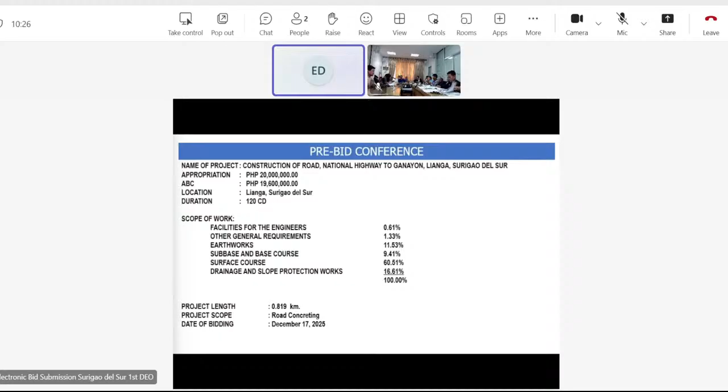Okay, we'll proceed to the presentation of the first project, 26NH001, presented by Engineer De Guzman. Please proceed, Engineer. Thank you. Thank you, Mr. Chair. Good morning once again. So for the project 26NH001, construction of road National Highway to Ganayon, Lianga, Surigao del Sur. This project has an appropriation of 20 million and the ABC is 19,600,000, located at Lianga, Surigao del Sur. The duration is 120 calendar days.

The scope of works: facilities for the engineer, 0.61%, other general requirements, 1.33%, earthworks, 11.53%, sub-base and base course, 9.41%, surface course, 60.51%, drainage and slope protection works, 16.61%, a total of 100%. The project length is 0.819 kilometers, and the project scope is road concreting. The date of bidding would be on December 17, 2025.

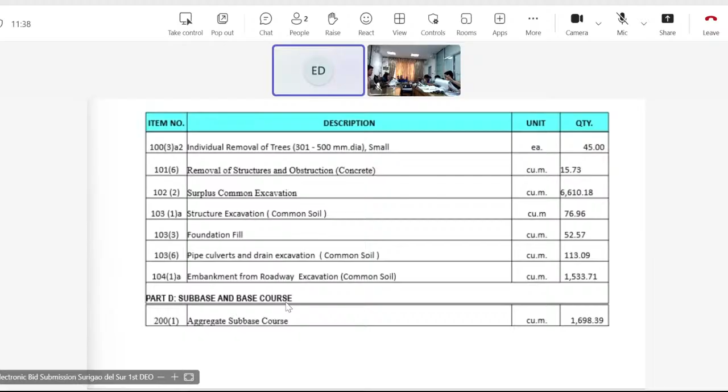Here is the summary for the item number, description, unit and quantity. For Part A, facilities for the engineer, and Part B, other general requirements. For Part C, earthworks, and Part D, sub-base and base course, item number, description, unit, and quantity are being shown. For Part E, surface courses, and Part F, drainage and slope protection works, item number, description, unit, and quantity are being shown.

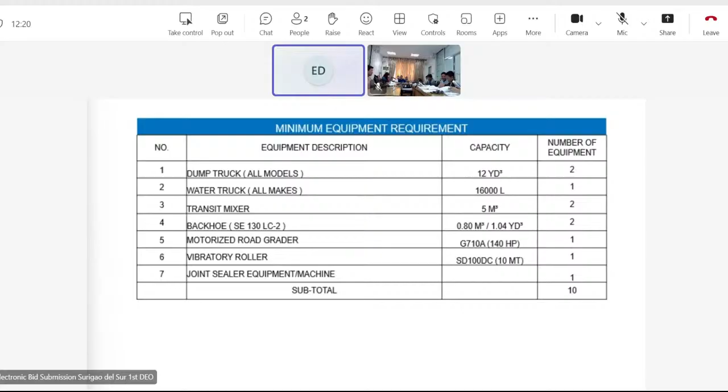For the minimum equipment requirement, we have dump truck 2, water truck 1, transit mixer 2, backhoe 2, motorized road grader 1, vibratory roller 1, and joint sealer equipment or machine 1, a total of 10. For the breakdown, for the construction of field office, we have 1 unit 7x7 bunkhouse. Then project billboard, we have 4 units for DPWH and 4 units for Cagwait. Here is the project billboard.

For the occupational safety and health program, we have 1 first aider and 1 safety practitioner. Both are full-time. Then for the materials, the name and specification, unit and quantity are being shown.

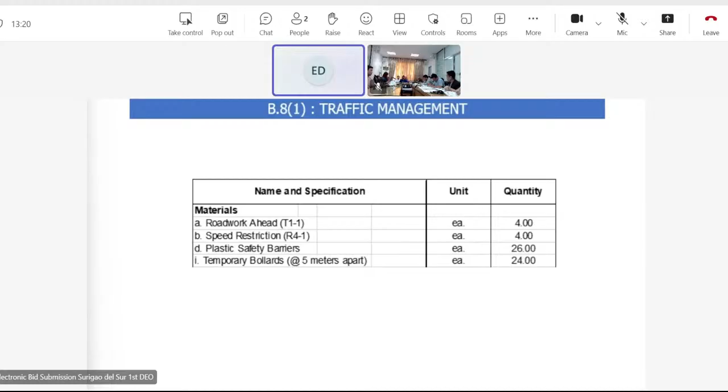For the traffic management, for the materials, the name and specification, unit and quantity are being shown. And note, the sign panels are metal sheet with 50 by 50 mm angle bar frame, not tarpaulin. Here is the materials source.

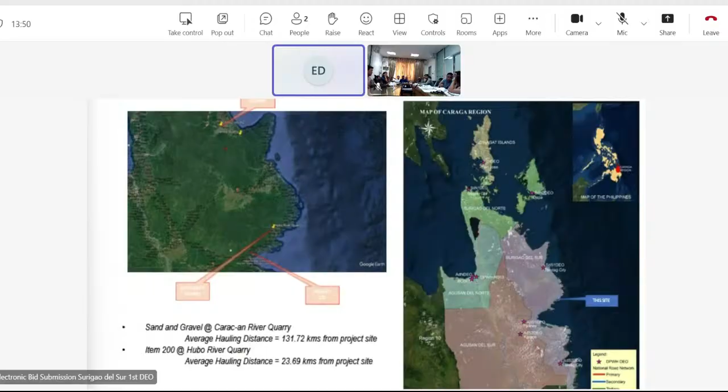For the sand and gravel, it is at Carac-an River Quarry with an average hauling distance of 131.72 kilometers from project site. Then for item 200, at Hubo River Quarry, a distance of 23.69 kilometers from project site. Here is the location and vicinity map of the project, composed of 3 sections.

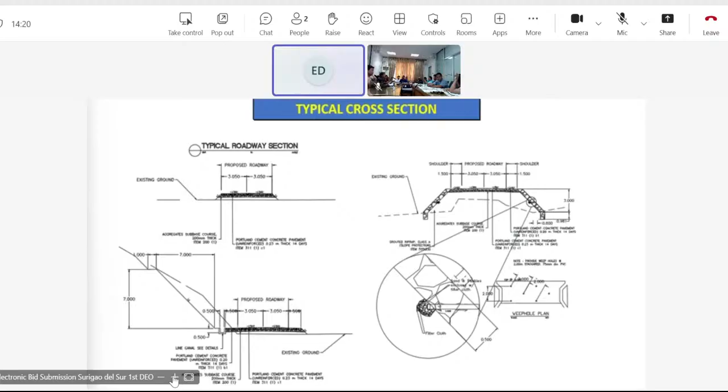We have also the typical cross-section and the details of slope protection and weep holes. For the plan and profile, road 1, the beginning is 0+00 and ending at 0+139. For road 2, beginning at 0+069.75, ending at station 0+233.

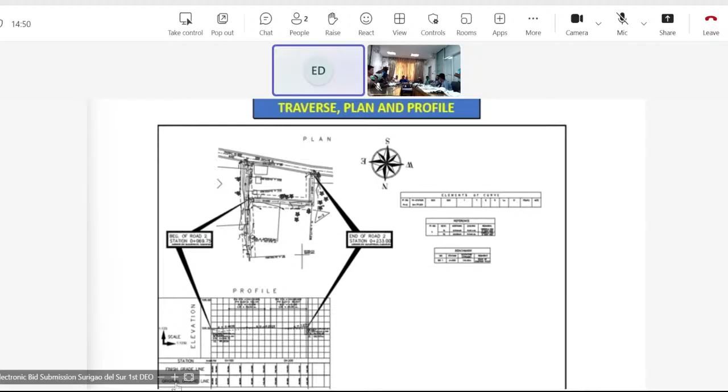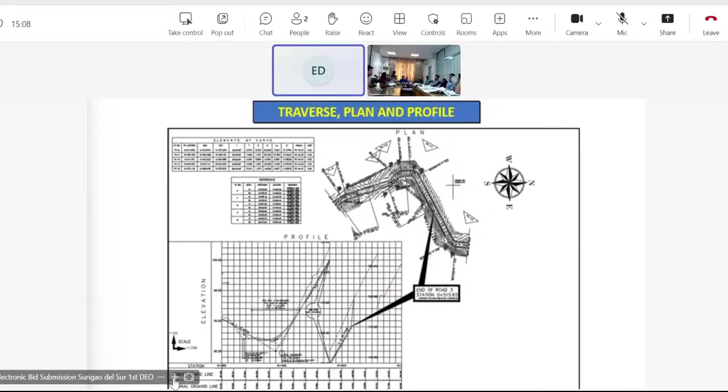And lastly, road 3, the beginning is station 0+00 and ending at 0+515.65, a total of 0.819 kilometers. Thank you.

So from the B1 DPWH, any comment from the BQ?

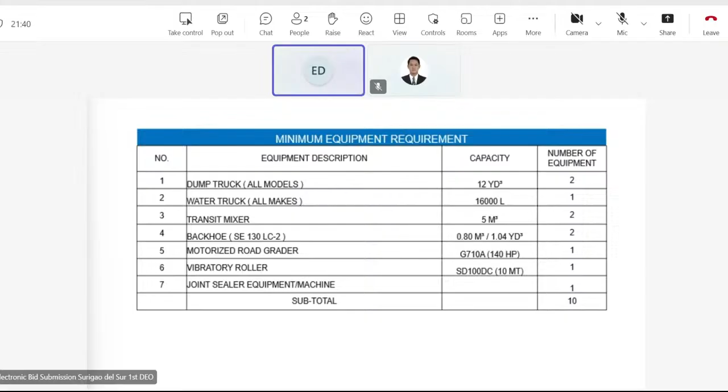So, since there is no comment, if there are any changes to these documents or to the quantity, I would like to remind the bidders to visit the DPWH website for any bid bulletin. It will be posted 7 days before bid opening, to be specific from December 10 for these particular projects.

Then the last day of posting, 7 days or till December 10. It is the responsibility of the interested bidders to view posted bid documents or bid bulletins.

Okay, proceed. Good morning once again. For the next project, contract ID 26NH0002, Surigao-Davao Coastal Road, kilometer 1259+00 to kilometer 1259+696, kilometer 1259+718 to kilometer 1260+22, kilometer 1261+400 to kilometer 1261+639, kilometer 1261+717 to kilometer 1261+869.

For an appropriation of 60,068,000 with an ABC of 52,588,640. Location at Lanuza, Surigao del Sur. For the scope of work, CW1 construction of road widening: facilities for the engineers 0.17%, general requirements 2.03%, earthworks 43.63%, subbase and base course 6.7%, surface course

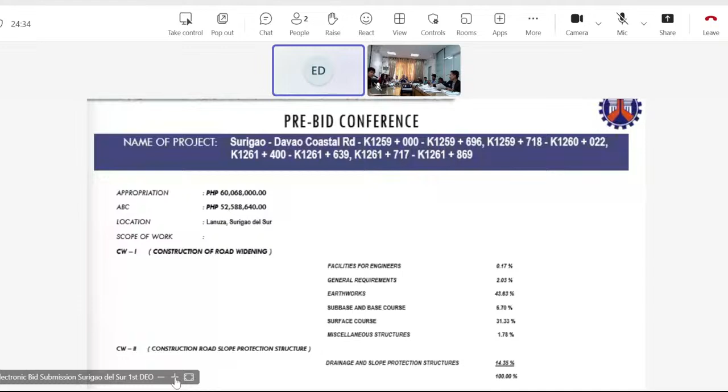31.33%, miscellaneous structures 1.78%; for CW2 construction of road slope protection structure, drainage and slope protection structures 14.35%, for a total of 100%. Project length 1.391 kilometers, 2.782 lane kilometers. Project scope, road widening, contract duration 222 calendar days, date of bidding December 17, 2025.

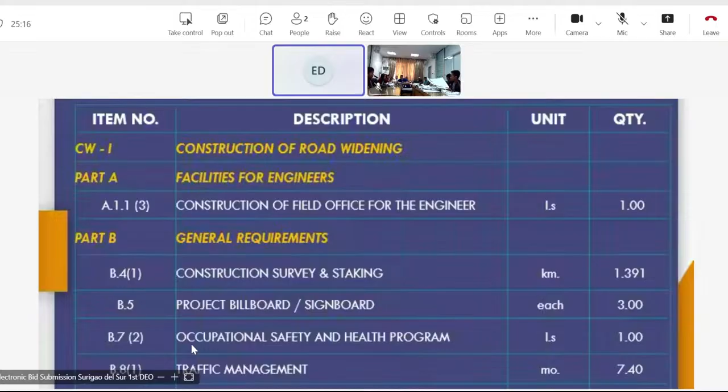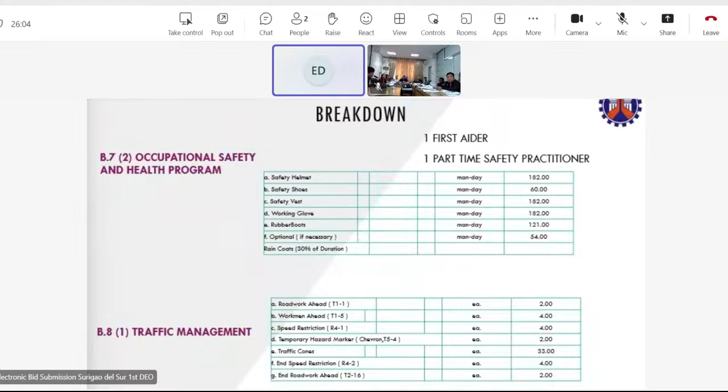For B.7.2, occupational safety and health program, B.8.1, traffic management, description, unit, and quantity are being shown. For Part C, earthworks, description, unit, and quantity are being shown. For Part D, subbase and base course, Part E, surface course, Part F, miscellaneous structures, item number, description, unit and quantity are being shown.

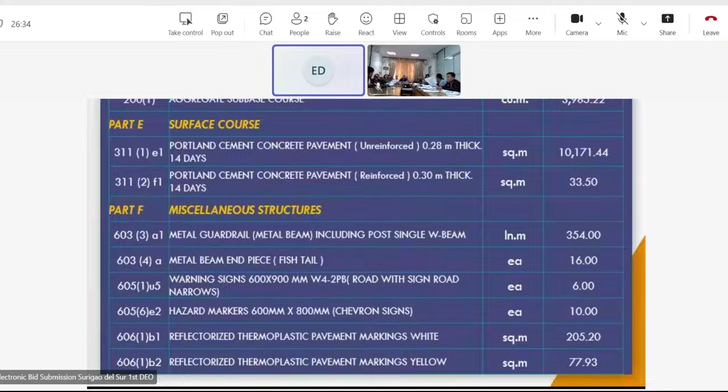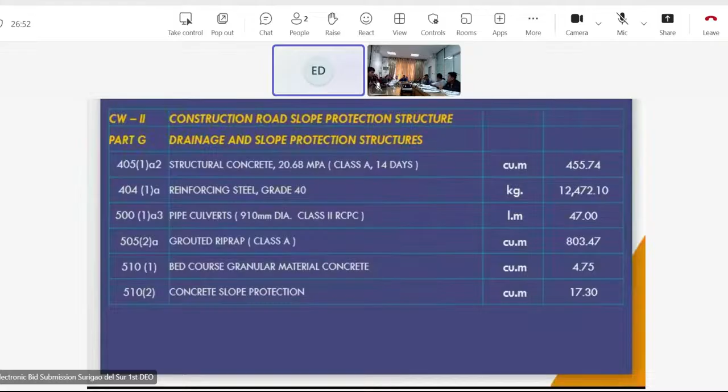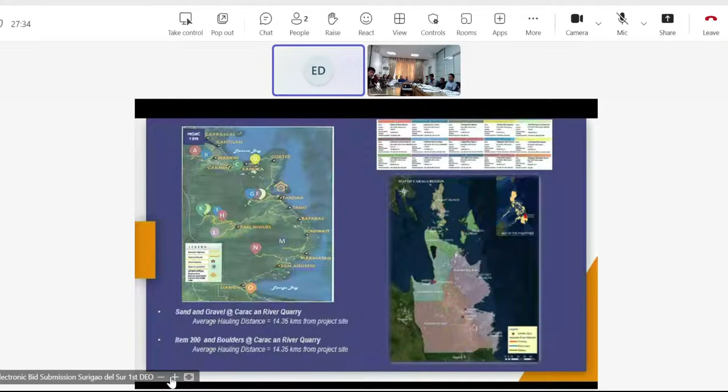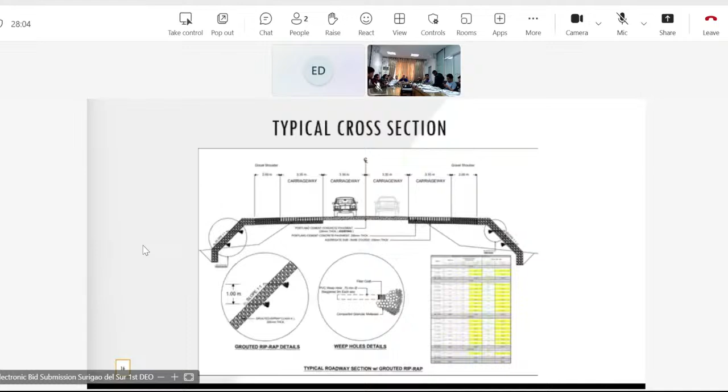For sand and gravel, Item 200 and boulders at Carac-an River Quarry, with an average hauling distance of 14.35 kilometers from the project site. And here's the typical section with canal. Typical roadway section widening at right side only. Typical roadway section with grouted riprap. Typical roadway section with concrete slope protection.

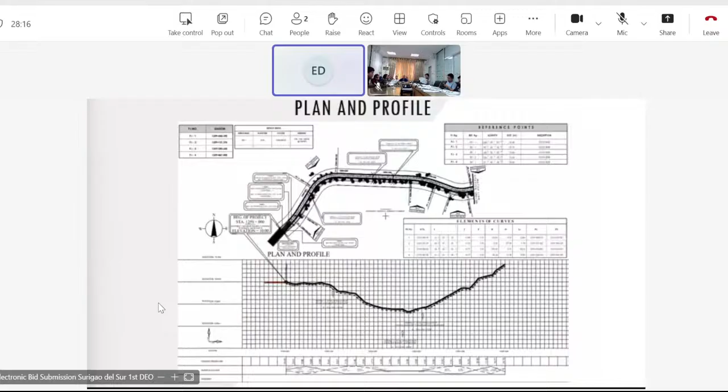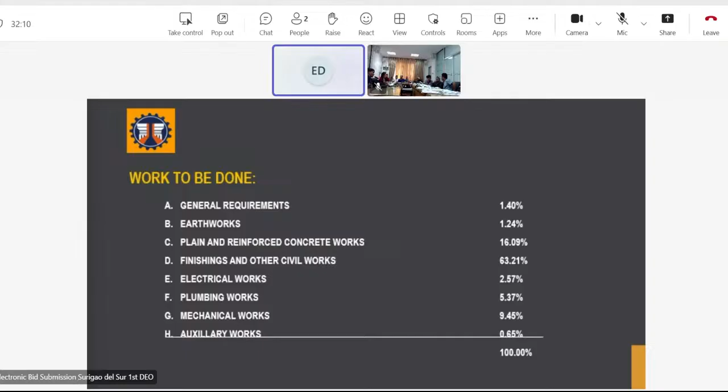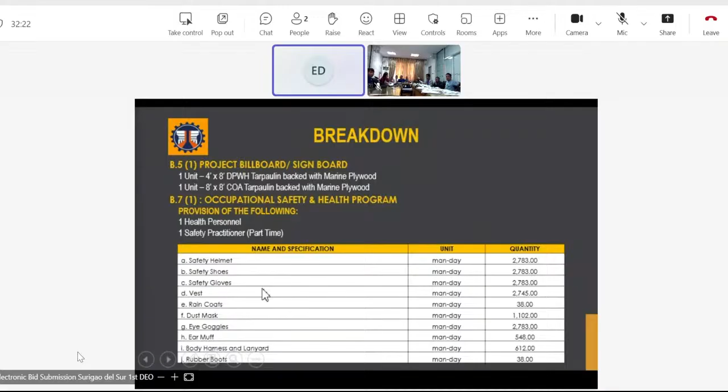For the breakdown, B.5.1, project billboard or signboard, 1 unit of 4x8 DPWH tarpaulin backed with marine plywood, and 1 unit of 8x8 COA tarpaulin backed with marine plywood. Then B.7.1, occupational safety and health program, provision of the following: 1 health personnel and 1 safety practitioner part-time. Name and specification, unit and quantity are as shown. For item number, description, unit and quantity of Part A, general requirements, Part B, earthworks, and Part C, plain and reinforced concrete works are as shown.

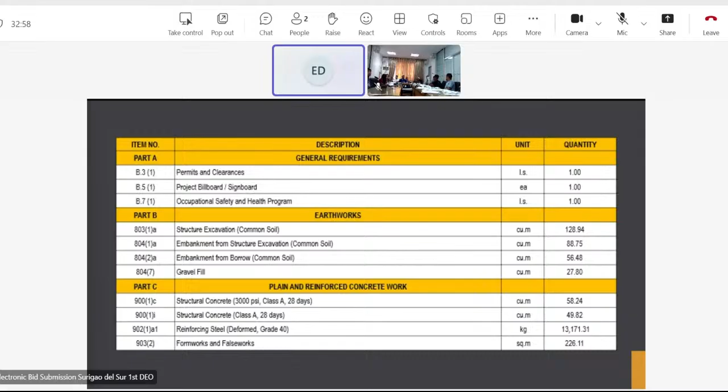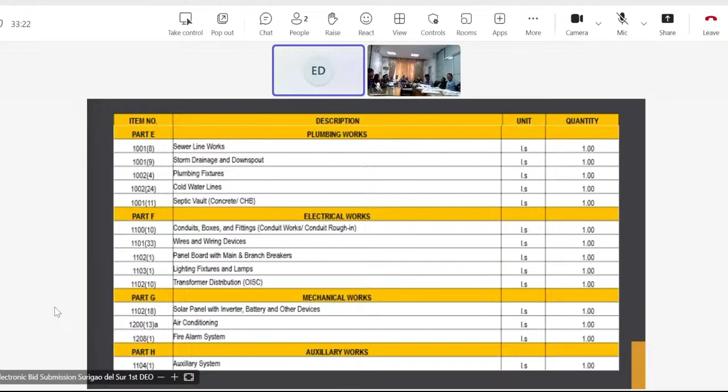Then for Part D, finishing and other civil works, item number, description, unit and quantity are as shown. Part E, plumbing works, Part F, electrical works, Part G, mechanical works, and Part H, auxiliary works, item number, description, unit and quantity are as shown. Then for the minimum equipment requirements, equipment description, capacity, and number of equipment are as shown. For the plan, perspective, vicinity map, site development map.

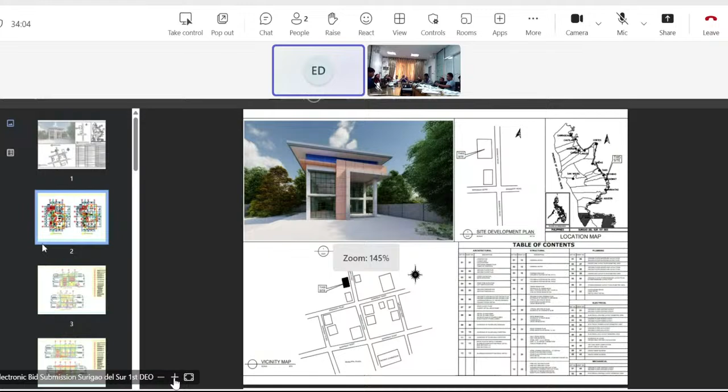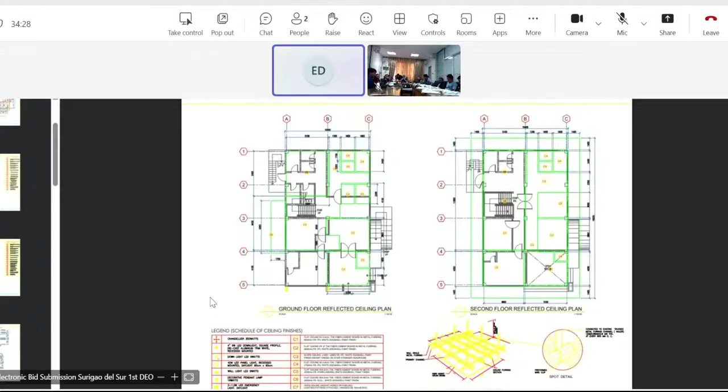Then the ground floor plan, second floor plan, front and rear elevation, right side and left side elevation, section through BB and section through AA, ground floor reflected ceiling plan and second floor reflected ceiling plan and ceiling typical detail, roof layout plan, and canopy detail above the ramp. The schedules of doors and windows, schedules of partition, then detail of PWD ramp and elevation of stairs, lobby, and detail of the PWD toilet.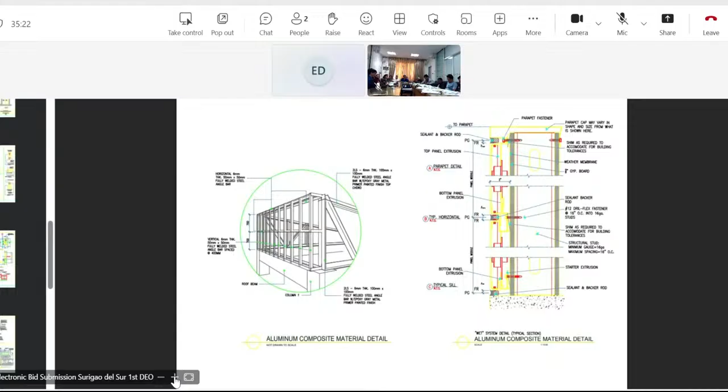Detailed plan of the metal cladding, aluminum composite material detail, side section A, side A12 and side section A13. Aluminum composite material detail. Next is foundation plan, column and footing detail, concrete pedestal detail, grade beam plan, wall footing plan, wall footing 1 and wall footing 2, second floor framing plan and typical section of beam, typical section of slab, the roof beam plan and ledge and beam detail section.

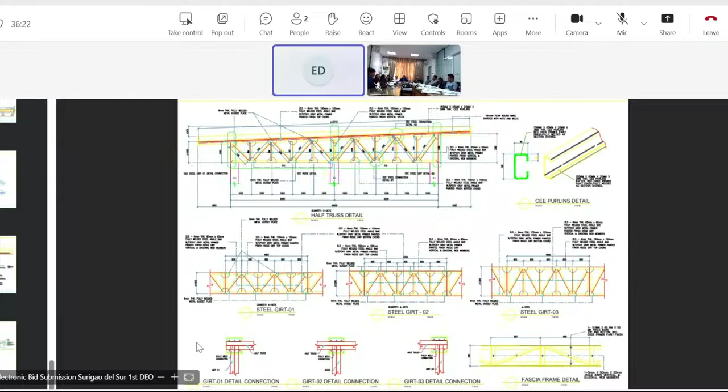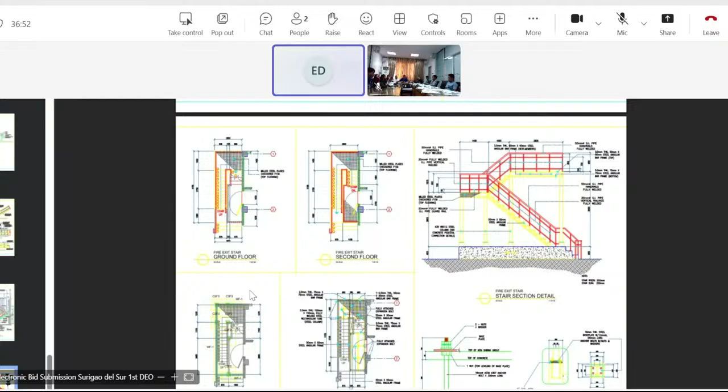Roof framing plan, steel base plate detail 1, 2, and 3, half truss detail, purlins detail, steel girt 1, 2, 3 detail connection, and fascia frame detail. Steel connection detail 2 and 1, spot detail, ground floor, second floor, and stair section detail. Fire exit stair ground floor plan. Then foundation plan of fire exit stair. Main steel framing of fire exit stair. Base plate connection detail and stair section detail.

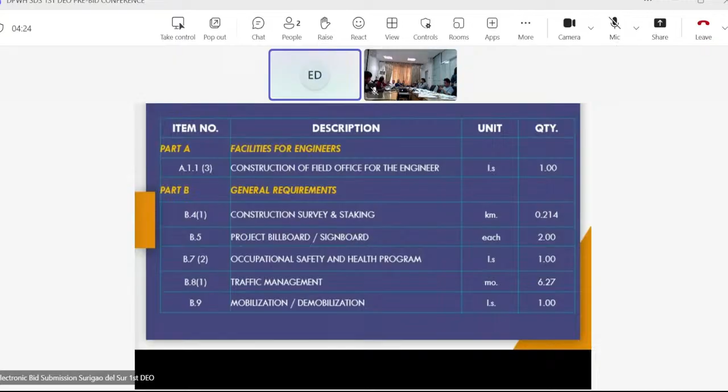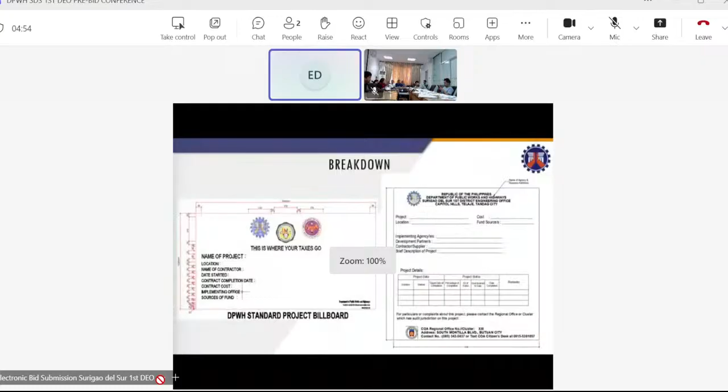For A.1.1(3), construction of field office for the engineers, we have 1 unit field office, bunkhouse type. B.5, project billboard and signboard, 1 unit, 4 feet by 8 feet tarpaulin for DPWH, and 1 unit, 8 feet by 8 feet tarpaulin for COA. And here's the DPWH standard project billboard and for COA. For B.7(2), occupational safety and health program. B.8(1), traffic management. Description, unit, and quantity are being shown.

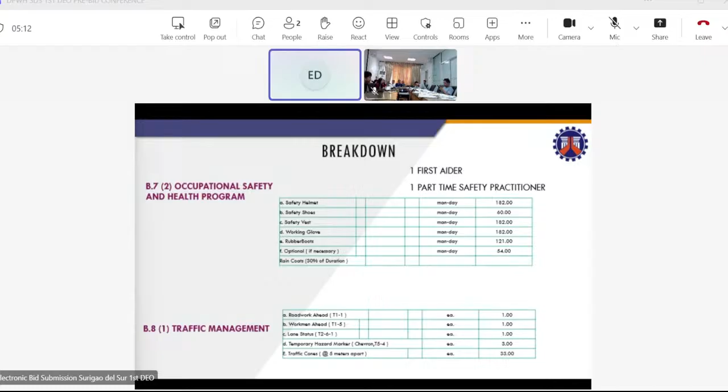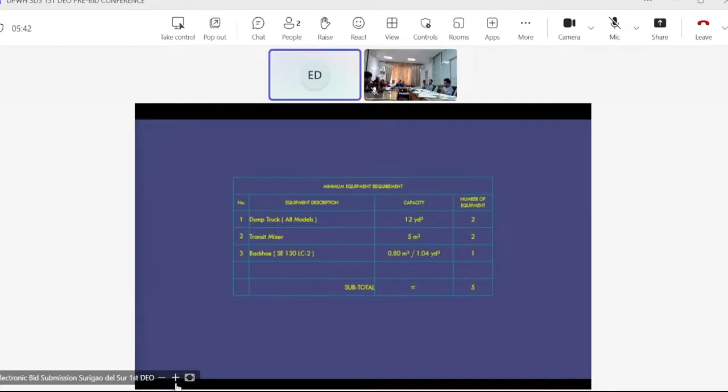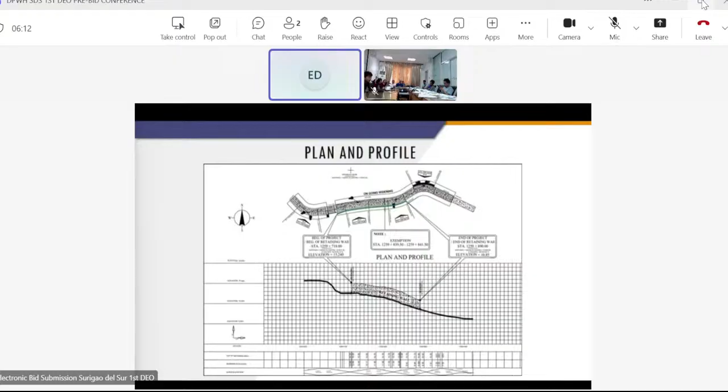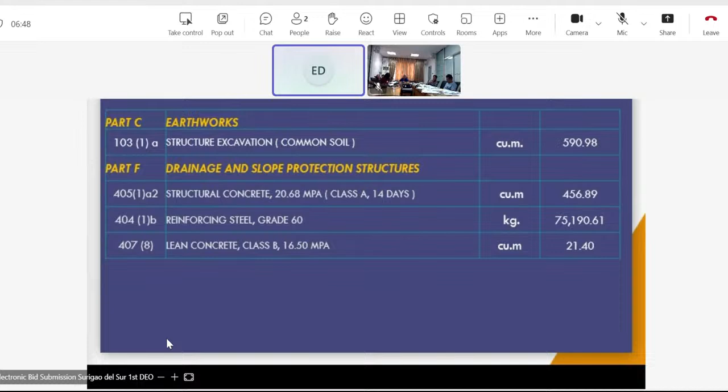And that's all. Okay, thank you, Engineer Ryan. Any comment from the procurement? We have: add height, retaining wall height of embankment must be 1.5 meters from natural ground line. Then we need 1 unit boom truck, bulldozer, and cargo service truck on equipment requirement. Include lean concrete quantity on program of work. Major category must be RCSPS retaining structures. That's all. So it is already corrected, Engineer Ryan. Okay, since it's already corrected, we'll proceed to the next presenter. Engineer Bragas.

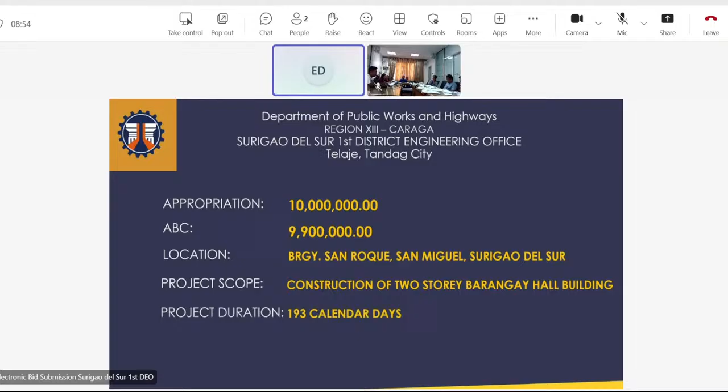Good morning once again. For the next project, we have the construction of multipurpose building, Barangay Hall, Barangay San Roque, San Miguel, Surigao del Sur. Contract ID number 26NH0005. Bidding date December 17, 2025. Appropriation 10 million. ABC 9,900,000. Location Barangay San Roque, San Miguel, Surigao del Sur. Project scope, construction of 2-story barangay hall building. Project duration, 193 calendar days.

For the scope of works, we have general requirements, 1.47%, earthworks, 2.78%, plain and reinforced concrete works, 17.78%. Finishings and other civil work, 53.10%. Plumbing works, 2.90%. Electrical works, 13.45%. Mechanical works, 7.62%. And auxiliary works, 0.9% for a total of 100%. For Part A, general requirements, Part B, earthworks, and Part C, plain and reinforced concrete work, item number, description, unit, and quantity are being shown.

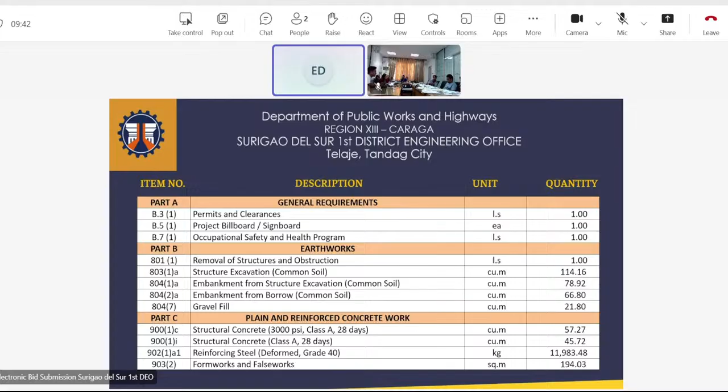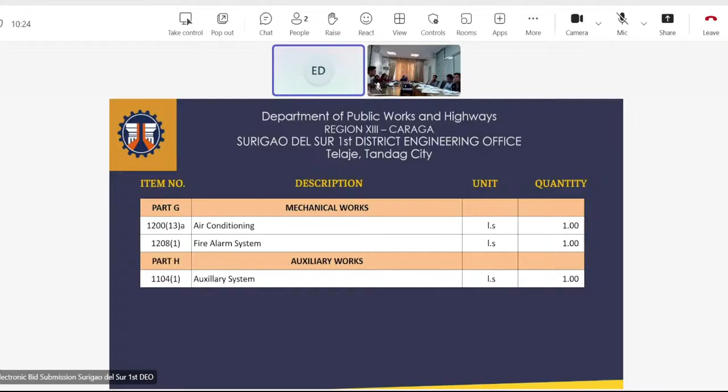For Part D, finishings and other civil works, item number, description, unit, and quantity are being shown. For the continuation of Part D, finishings and other civil works, item number, description, unit, and quantity are being shown. For Part E, plumbing works, Part F, electrical works, item number, description, unit, and quantity are being shown. For Part G, mechanical works, and Part H, auxiliary works, item number, description, unit, and quantity are being shown.

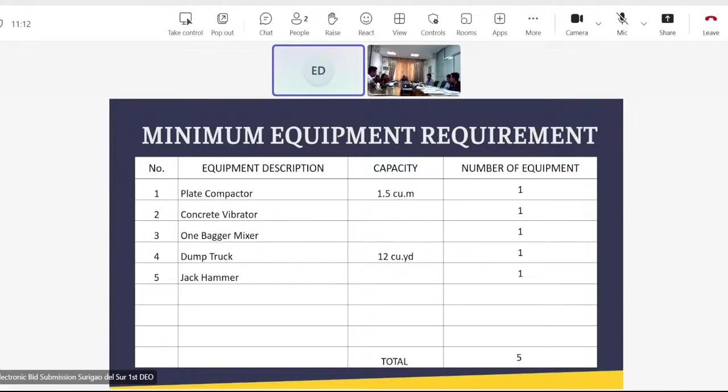For the project billboard, we have 1 unit 4x8 DPWH tarpaulin and 1 unit 8x8 COA tarpaulin. For the occupational safety and health program, we have 1 health personnel full-time, and the description, unit, and quantity are being shown. For the minimum equipment requirement, we have 1 plate compactor, 1 concrete vibrator, 1 bagger mixer, 1 dump truck, and 1 jackhammer for a total of 5 equipment. Next for the plans.

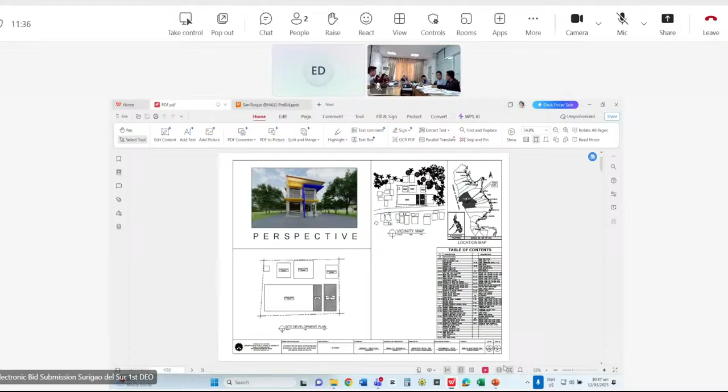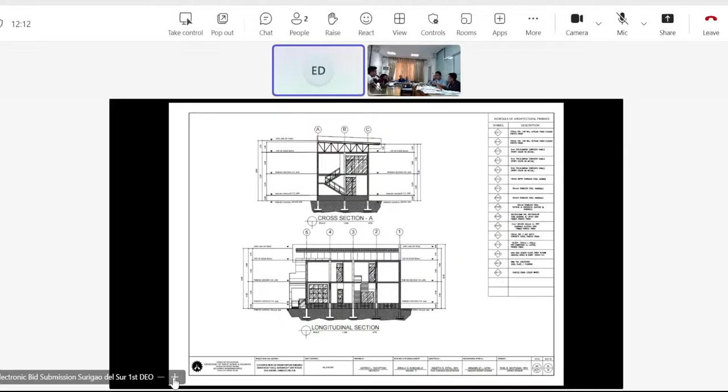For architectural plans, we have perspective, site development plan, vicinity map, and location map. The ground floor plan and second floor plan. The front view elevation and left side view elevation. The rear view elevation and right side view elevation. The cross section A and longitudinal section. The schedule of doors and windows. The ground floor reflected ceiling plan and second floor reflected ceiling plan. The canopy detail and detail of PWD ramp. Detail plan of metal cladding and its section.

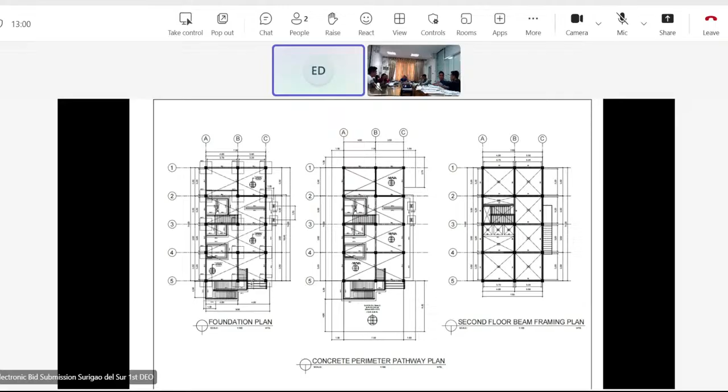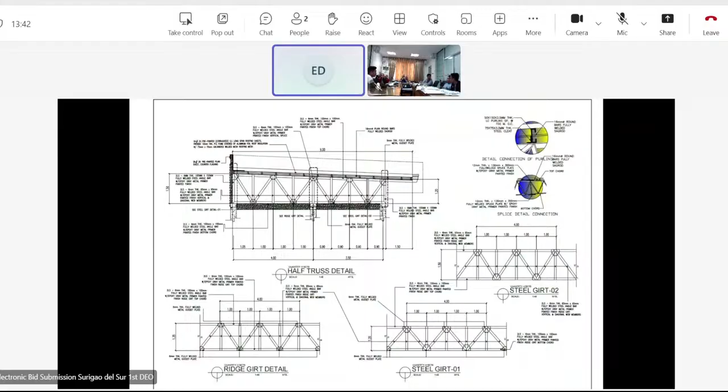Next for the structural plans, we have the foundation plan, concrete perimeter pathway plan, and second floor beam framing plan. The column and footing details, the wall footing, and the concrete pedestal detail, and steel base plate detail. Schedule of footing tie beam, schedule of concrete slab, schedule of beams, and typical section of beam and slab. The roof beam plan, roof framing plan, and roof plan. And also the fascia frame detail. The truss details, ridge, and steel girt. The spot detail of steel connection and stair detail. Stair plan detail and stair section detail.

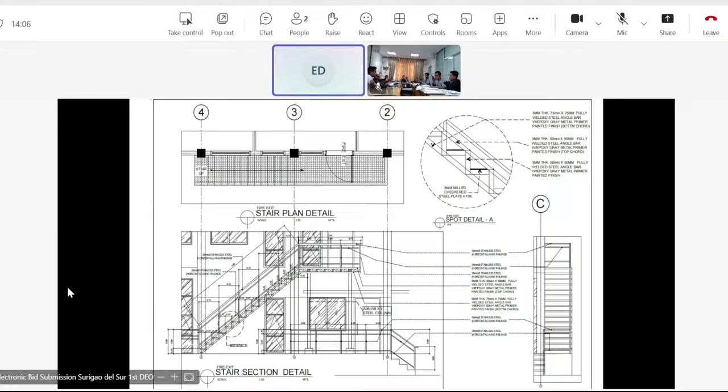Next for the plumbing, we have the ground floor water layout plan and second floor water layout plan. Ground floor sanitary layout plan and second floor sanitary layout plan. The ground floor storm drain layout plan and second floor storm drain layout plan. The isometric view for the sanitary layout plan. An isometric view for the water line layout plans. The septic vault detail, catch basin detail, clean out and service tap connection detail.

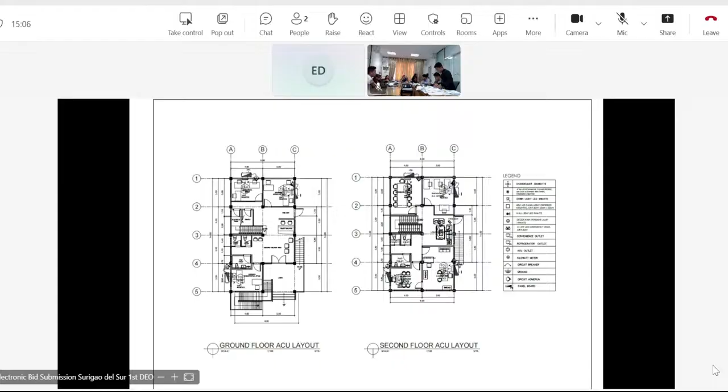Next for the electrical plans, we have the ground floor lighting layout and second floor lighting layout. The power layout for the ground floor and second floor. The ACU layout for ground floor and second floor. The schedule of loads and design analysis and calculation.

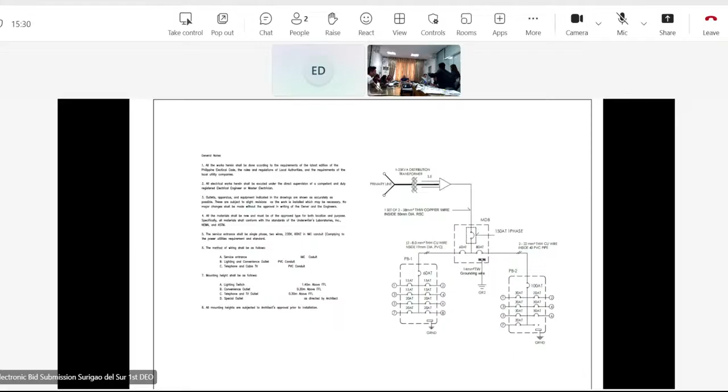Voltage drop computation, short circuit analysis. Next for the panel board. Next for the solar system, the single line diagram. For the mechanical, you have the fire alarm layout for ground floor and second floor. The schematic riser diagram of automatic fire alarm system. That will be all. Thank you.

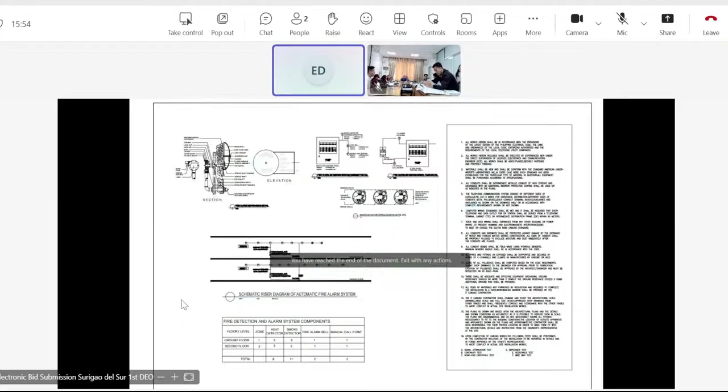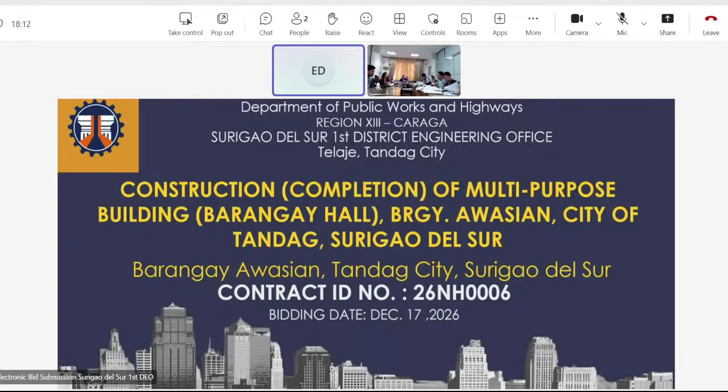Good morning once again. For our next project, we have construction completion of multi-purpose building, Barangay Hall, Barangay Awasian, City of Tandag, Surigao del Sur. Located at Barangay Awasian, Tandag City, Surigao del Sur. Contract ID number 26NH0006 and bidding date December 17, 2026.

Appropriation cost 6 million pesos. ABC 5,940,000 pesos. Location Barangay Awasian, Tandag City, Surigao del Sur. Physical target 1 number of building. Project scope completion of Barangay Hall office. Project duration 135 calendar days.

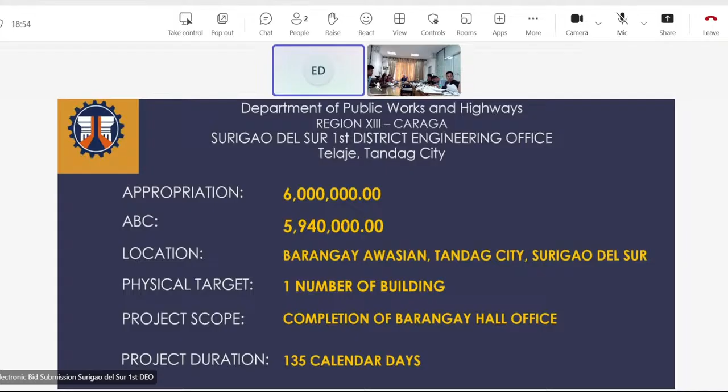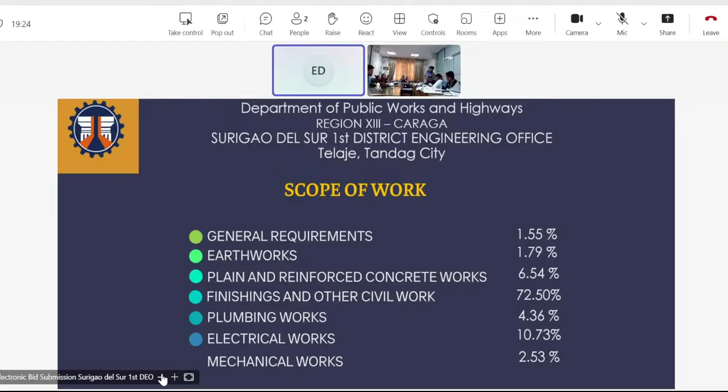Scope of works. For general requirements, we have 1.55%, earthworks 1.79, plain and reinforced concrete works 6.54, finishings and other civil works 72.50%, plumbing works 4.36%, electrical works 10.73%, mechanical works 2.53%, for a total of 100%. For our part A, we have the general requirements. Part B, earthworks. Part C, plain and reinforced concrete work. The item, the general requirement, the unit, and quantity are being shown.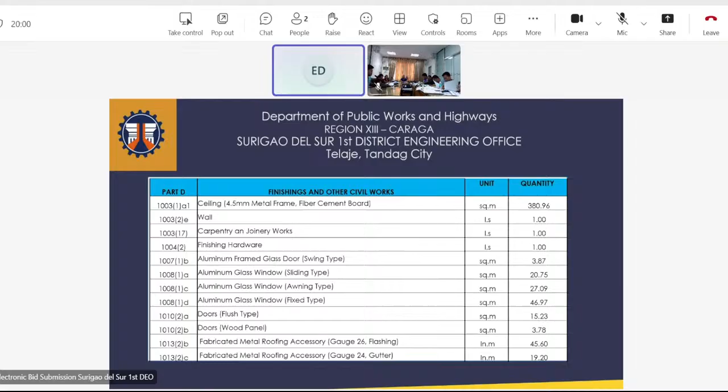For part D, we have the finishings and other civil works. The item, the description, quantity, and unit are being shown. And we have here the continuation for part D. Part E, plumbing works. Part F, electrical works. Part G, mechanical works. Item, description, unit, and quantity are being shown.

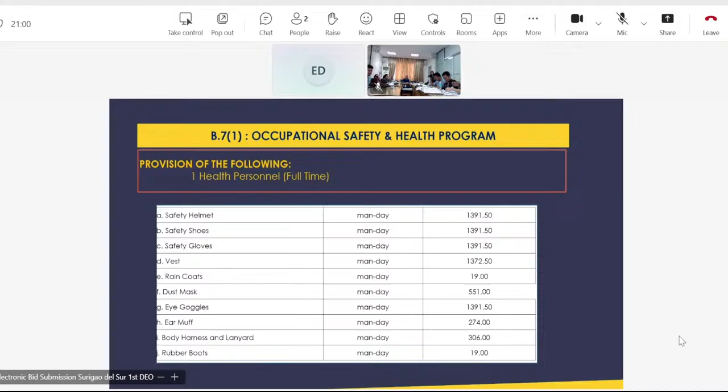For B.5 project billboard, we have 1 unit 4x8 DPWH tarpaulin and 1 unit 8x8 COA tarpaulin. For B.7 occupational safety and health program, 1 health personnel full-time. The description, unit, quantity are being shown. For the minimum equipment requirement, we have 1 plate compactor, 1 concrete vibrator, 1 bagger mixer, 1 dump truck, and 1 jackhammer.

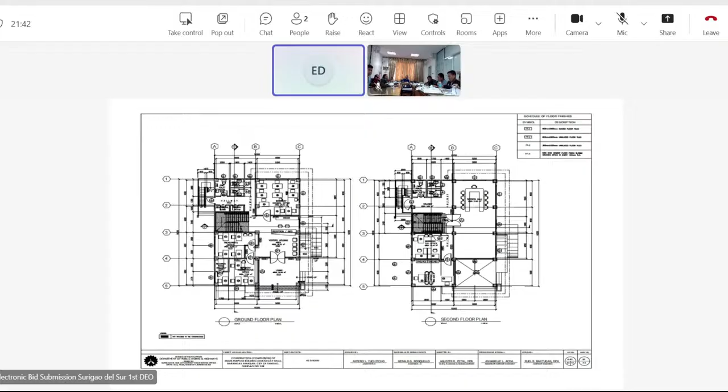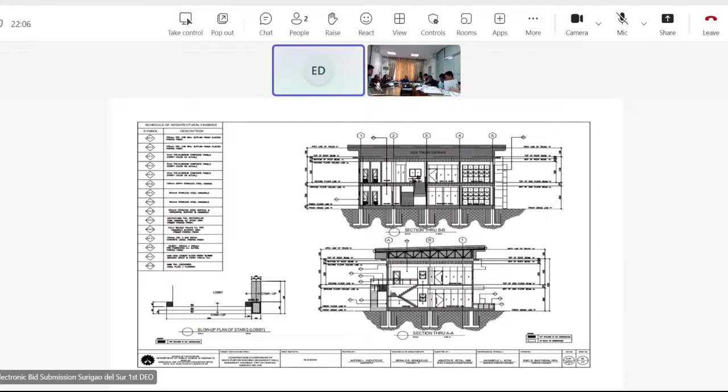Let's proceed to the plans. First, we have the architectural plans. For the perspective, we have here also the site development plan, vicinity map. We have here also the ground floor plan and second floor plan. Front and rear elevation. Right and left side elevation. We have here the section through AA and through BB. And also the blow up plans for the stairs located at the lobby. We have here also the ground and second floor ceiling plan.

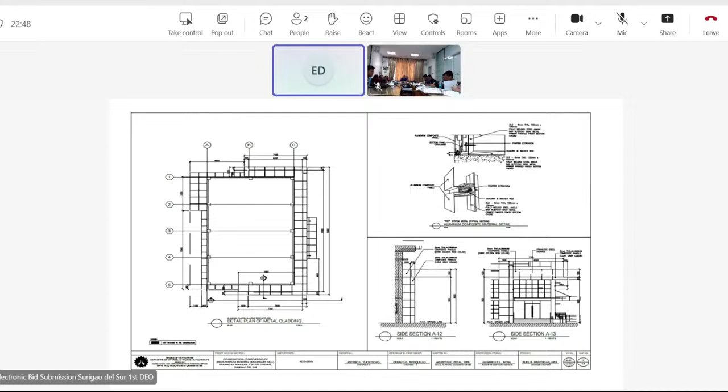The windows and doors schedules. Stairs and ramps details. Also the cladding details and plan. For the structural plans, we have the foundation plan. The detail for the concrete pedestal for the fire exit. And details also for the wall footing, both wall footing 1 and wall footing 2. We have here also the detail and elevation view for the fire exit.

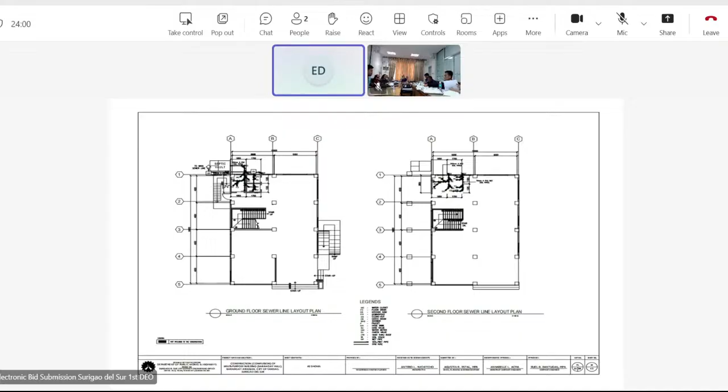For plumbing plans, we have ground and second floor water line layout. The isometric view for water layout. We have also the ground and second floor sewer line together with this isometric view. Storm drainage layout, also isometric. Then septic vault detail.

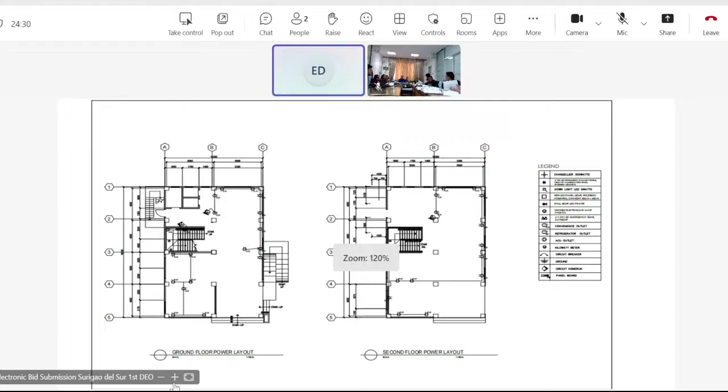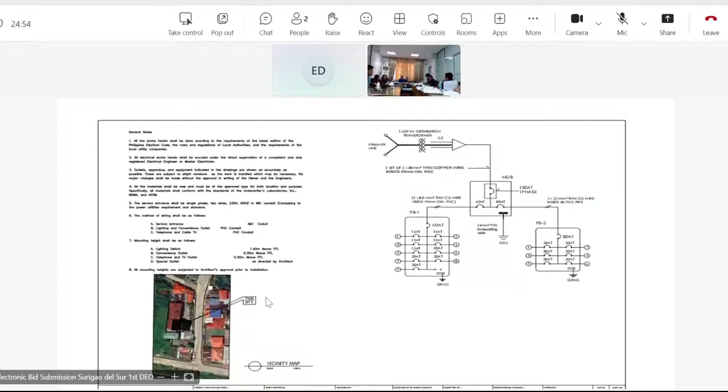For the electrical plans, we have the ground floor and second floor lighting layout, the ground floor and second floor power layout, and the ground floor and second floor ACU layout. Also included the schedule of loads, the design analysis and calculation. We have also here the voltage drop computation, the short circuit analysis. And this is the perspective view of the project. That would be all. Thank you.

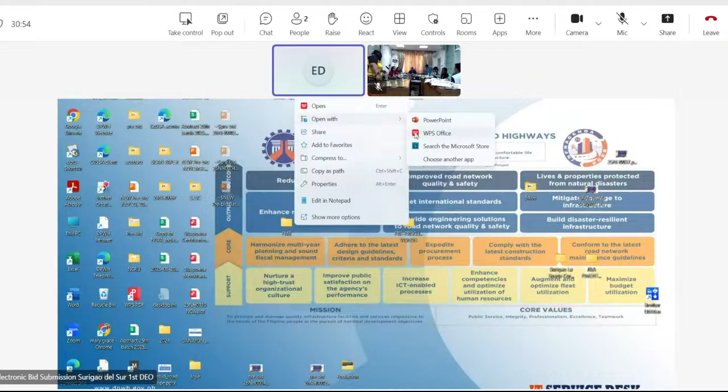Okay, before anything else, since we have changes on our checklist, I would like to request Engineer Aying to read the revised checklist. For the technical components of the bid, first, the certificate of PhilGEPS membership. Next is bid security, in the prescribed amount and validity, in accordance with RA 12009.

Next, project requirements. It shall include the following: organizational chart for the contract, key personnel for the contract, major construction equipment, and traffic maintenance. Next, the omnibus sworn statement in the form prescribed by RA 12009. Next is the latest general information sheet, reflecting the beneficial ownership information duly received by the Securities and Exchange Commission, for corporations. Next is the sworn affidavit of eligibility and beneficial ownership, following the template attached as Annex A, for all bidders, including sole proprietorships.